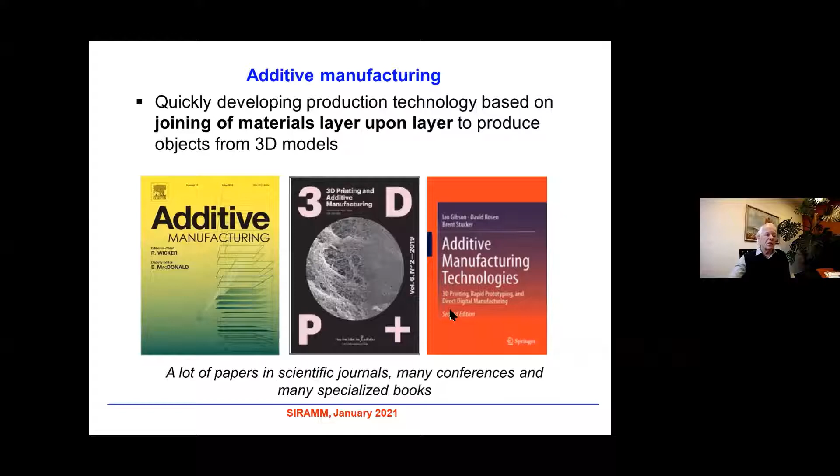Yesterday I checked the database Web of Science. If you check the topic additive manufacturing for the year 2020, you find 6,100 results. Even for this year, 2021, we can find 295 results - more than 10 papers daily. If I take a more specialized term, metal laser sintering, in 2020 there are 211 results. In the broader database Scopus, topic additive manufacturing brings in nearly 30,000 results, and in all years together, 135,000. So could you imagine following or reading all these papers? Impossible.

When we speak about additive manufacturing, very often we hear about the next industrial revolution. I think it is a little bit exaggerated. However, I agree that it is very interesting, very good technology, advanced technology, however for special tasks.

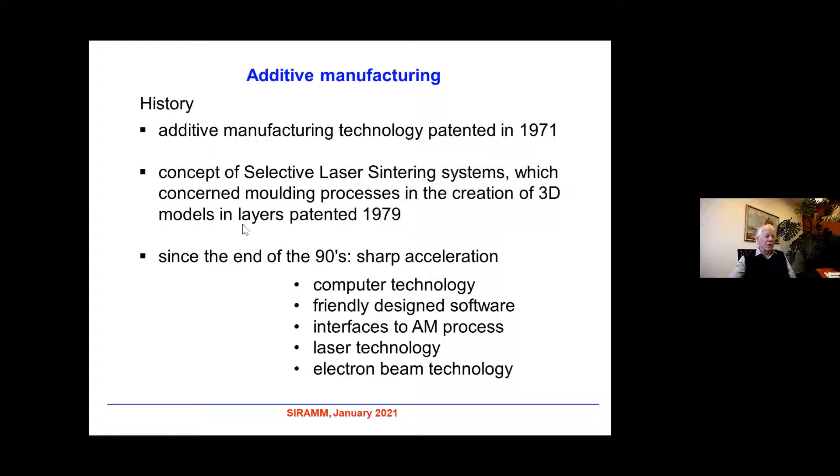As regards materials, it started with polymers. Since the 90s it was focused on metals, and nowadays we are able to print also ceramics.

3D printing or additive manufacturing has obvious advantages. They are mentioned in all papers in the introduction, and they are very nice. These advantages were listed today in the first talk by Professor Torgersen. I would repeat that manufacturing of parts can be done directly from a CAD file. It is very comfortable, and we can do rapid prototyping - we can change the file very quickly and produce a new component.

Very important is that we can build components with very complex shape with internal features. Some of them were presented also in the previous talks, very complicated components for aerospace. Very important is that this technology is connected with minimum material waste, and in the case of expensive materials, it is something significant.

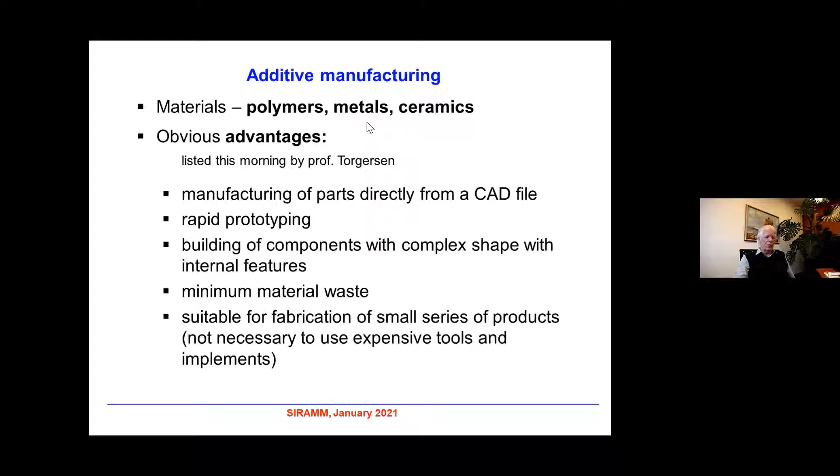On the other hand, there are also drawbacks and shortcomings, and they are mentioned not so often. First of all, it is a very complex technology. The problem is that there are many processing parameters which strongly influence the quality of products and the material behavior. And the problem is that in many cases, if you buy a machine for 3D printing of metals, some parameters are given and you cannot change them so easily.

The technology for metals, for printing of alloys, is expensive. But this is true for metals - it is not so true for plastics.

Problem is rough surface finish. The surface finish is different in different orientations, and it may be a problem in the case of components with very complicated shape, with internal features, and in the case when the components are cyclically loaded, because the surface finish, if it's not good, can decrease the fatigue properties.

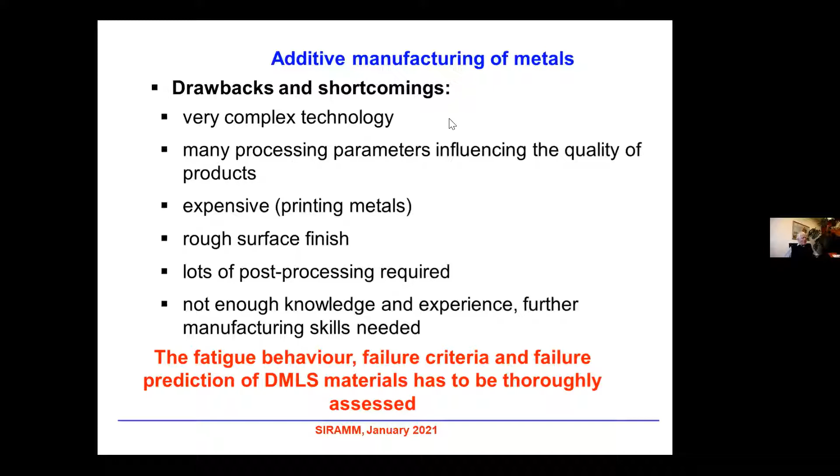Though there is this enormous amount of papers and publications, it is interesting that up to now we do not have enough knowledge and experience. I think that further manufacturing skills are needed, especially in particular cases. So please, I would like to stress that especially fatigue behavior, failure criteria, and failure prediction of direct metal laser sintered materials has to be thoroughly assessed for particular cases.

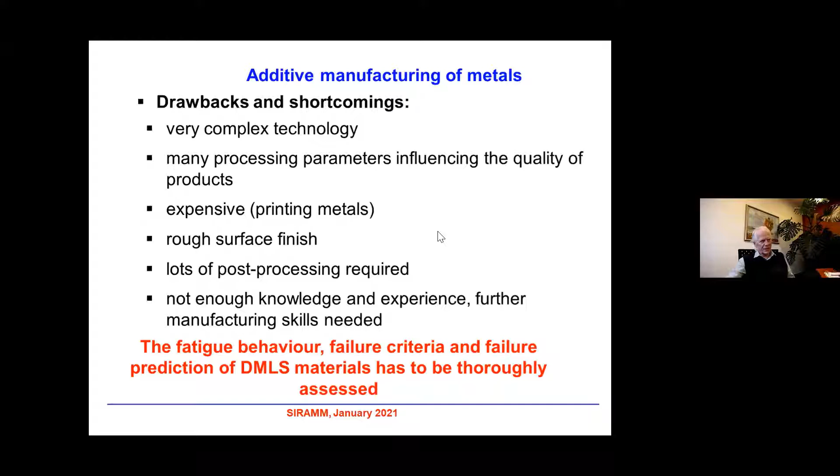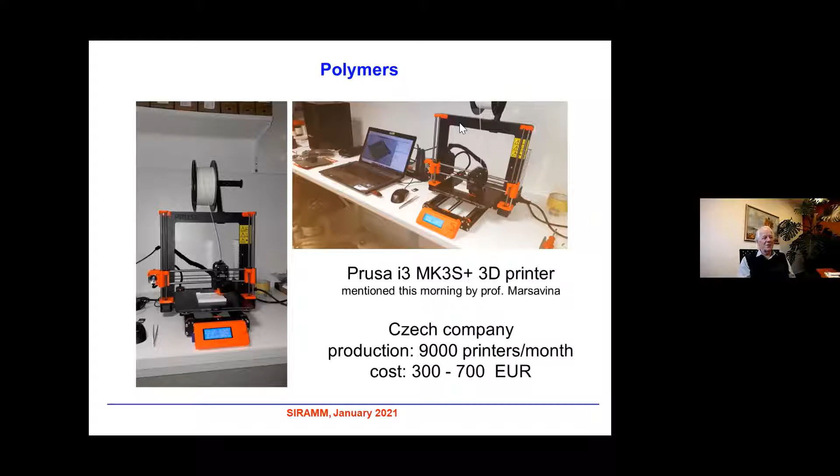This morning we have heard talk about non-metallic materials or plastics, and in our institute we have these machines which are from company Prusa. It is a Czech company, and these machines were mentioned also this morning by Professor Marsavina. They have the same machines in this institute. These machines are produced in Prague, and it is surprising that they produce 9,000 printers a month. The cost is quite low, 300 to 700 euros, so you can buy it also for your own home.

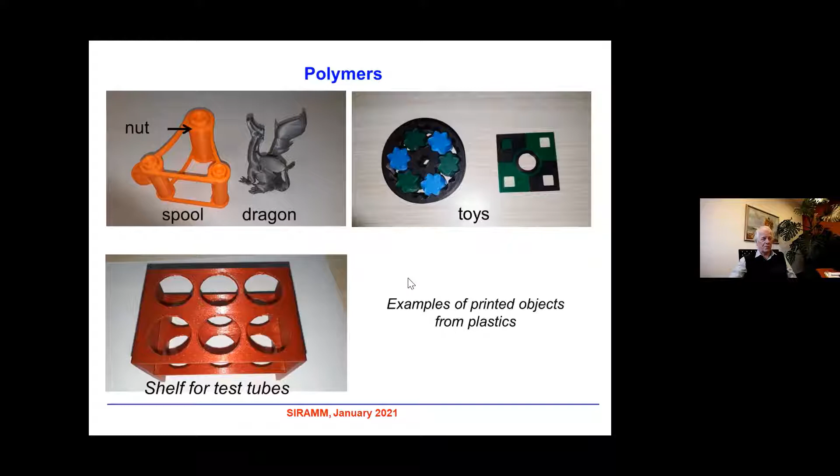You can print things like this. These are only examples for your children. You can print dragons, you can print such a spool. It is interesting that these nuts here, you cannot lose, because you can draw through it, but it cannot be lost. You can print for your lab shelf, test tubes, or some toys. So in the case of plastics, it is very easy.

However, in the case of metallic materials, it is much more complicated. I would like to speak in my talk about two materials, namely titanium 6 aluminum 4 vanadium alloys, and about the super alloy Inconel.

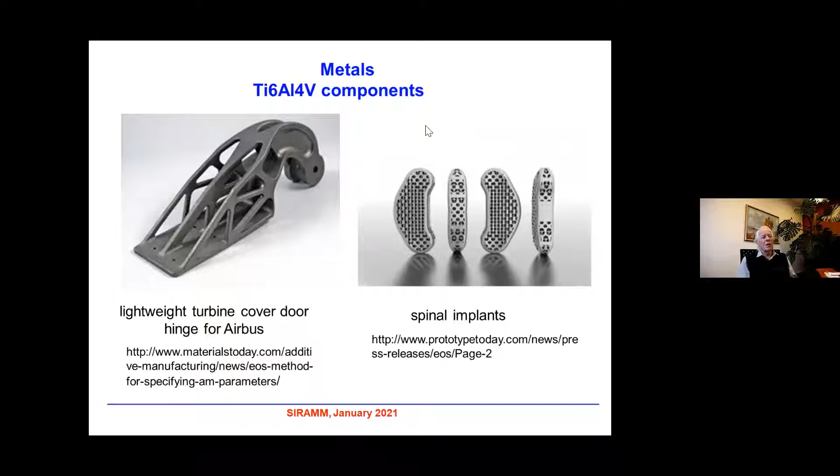On the right-hand side, I would like to show you an example of spinal implants. Again, a complicated component. Could you imagine producing something like that by conventional technology?

Additive manufacturing of metals has practically two main branches, I would say. On the left-hand side is the branch of powder bed technologies. So we build components from powder, and one of the most often used is laser beam melting, and among them direct metal laser sintering. It is a method I would discuss in my talk, and electron beam melting, where instead of laser an electron beam is used.

Then we have powder deposition technologies. It means laser engineered net shaping, direct metal deposition, or laser cladding. There are many other technologies, but I would like to concentrate myself on direct metal laser sintering.

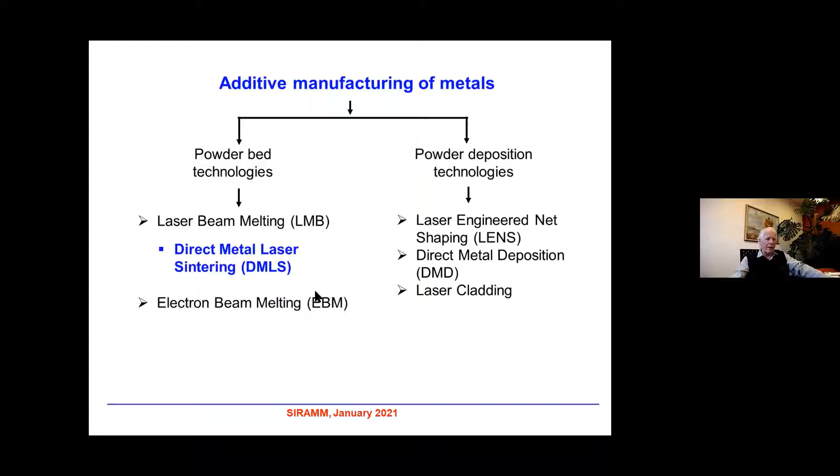The method is relatively easy, and only to briefly mention: the component is placed on this building platform. In the case of direct metal laser sintering, the platform is covered by a very thin layer of powder, which is in this container, applied by this recoater. Then the thin layer of powder is melted by a laser beam, which is coming from the laser unit through the scan head, which is moved by computer, and layer-wise the component is built. The building platform is decreasing.

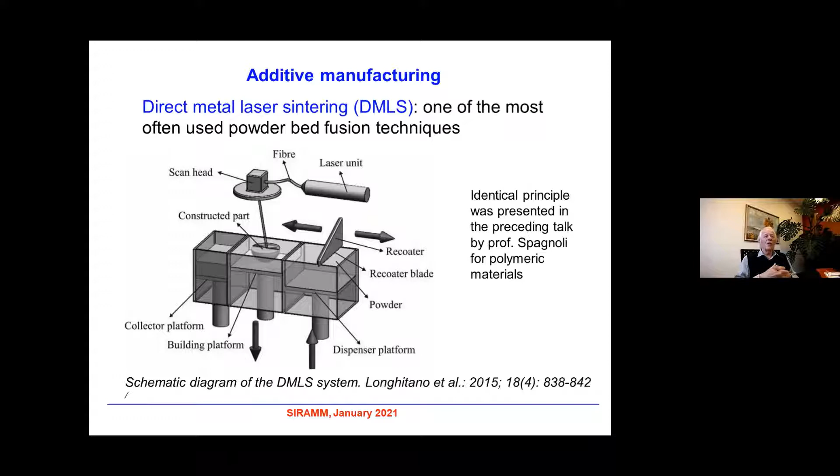Practically the same principle was presented in the preceding talk by Professor Spagnoli for polymeric materials. So the principle is identical.

In the case of metallic materials, the machines are naturally much more expensive than systems for plastics, and cost is in the hundreds of thousands to millions of euros. Here you can see examples of three machines, namely Renishaw A250, EOSINT M270, and SLM 280HL. These are machines on which we produced our specimens for our testing.

At the market today, you can find many, many specialized machines.

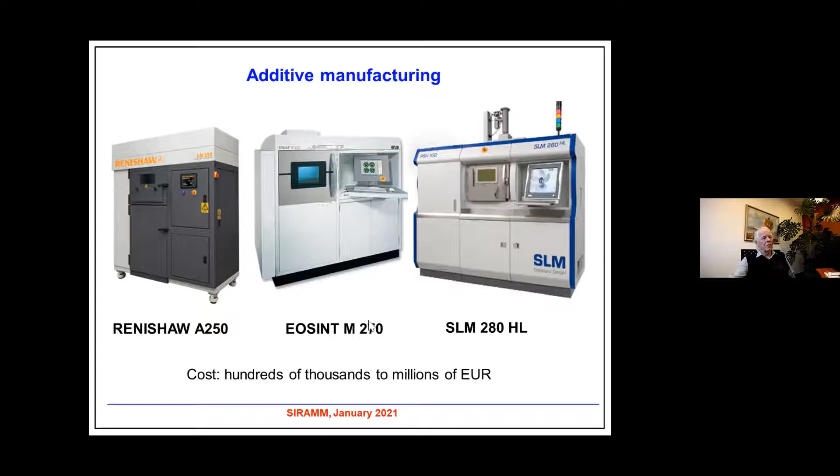Properties of direct metal laser sintered materials are strongly dependent on many processing parameters. It was mentioned also in the preceding talks. But I would like to stress that in the case of metallic materials, it is much more important to set precisely all parameters.

We begin with input powder. The input powder has to have good quality, purity, size, and so on.

Important is the laser scanning strategy. It means how the laser beam is moving on the platform, on the component. This strategy may be specific for specific machines. Nowadays there are even systems using two or more laser beams simultaneously to increase the velocity of building.

Important is energy density: how much energy the electron or laser beam brings into the material. Important is scan speed: how quickly the laser beam moves on the material, on the powder, and how quickly it produces this melting pool. Also the laser power is important.

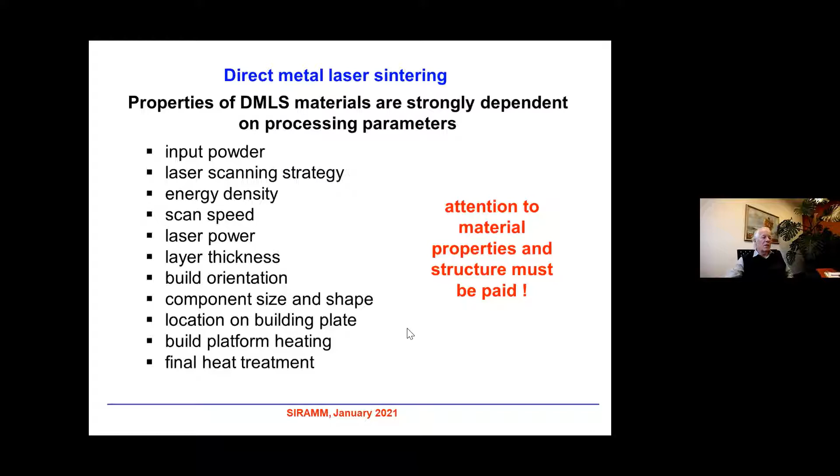At the beginning I told you I will speak about two engineering alloys which are often used, namely titanium alloy, titanium 6 aluminum 4 vanadium, which is low weight, high strength, biocompatible, with high corrosion resistance. It is used in conventional form in aerospace, medicine, and chemical industry.

The second material, completely different, is Inconel 718 super alloy, used for high temperature and cryogenic applications, with excellent high temperature and cryogenic properties. It is used in many industrial applications.

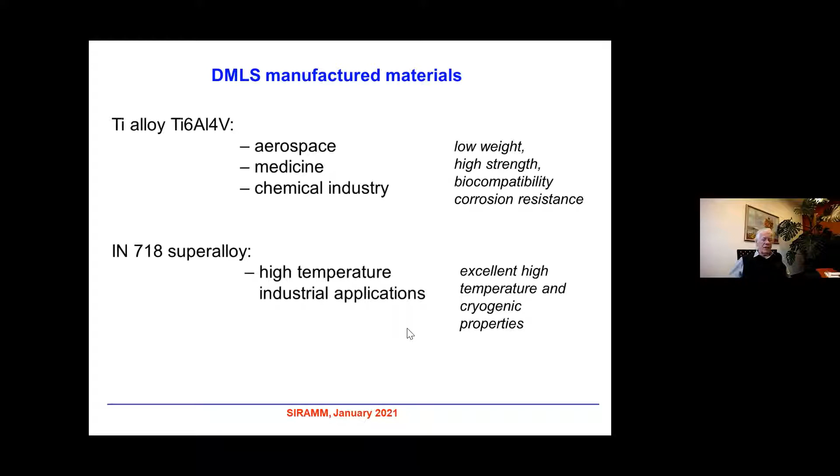Also important is uneven defect distribution in the component. If we have a place where defects concentrate, and simultaneously this place is loaded by cyclic loads, it may be dangerous.

A problem is directionality of structure, meaning anisotropy, due to layer-wise building of the material. High residual stresses in the component also play a big role in this technology, and naturally surface quality, which is dependent on the building direction and again strongly influences the fatigue behavior of materials.

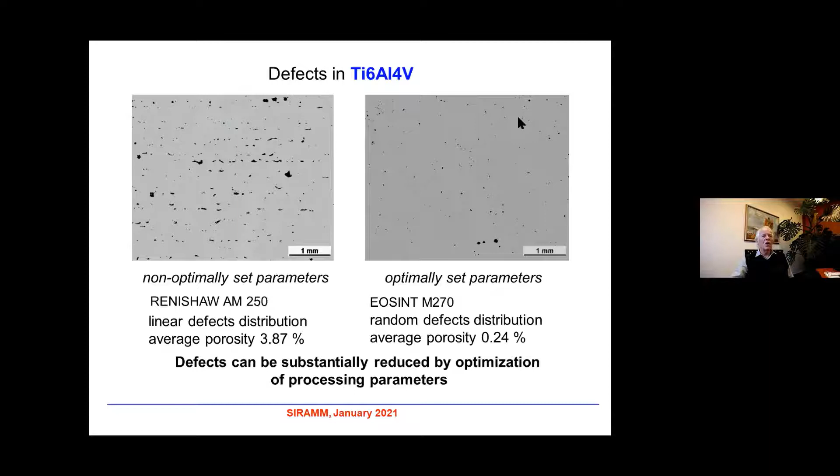Such material is naturally not very good from the point of view of fatigue behavior. On the other hand, on the right-hand side you can see the microstructure of titanium 6 alloy with optimally set parameters, produced on an EOSINT M270 machine. The defect distribution is random, and the average porosity decreased to 0.24%. So please remember that defects can be substantially reduced by optimization of processing parameters.

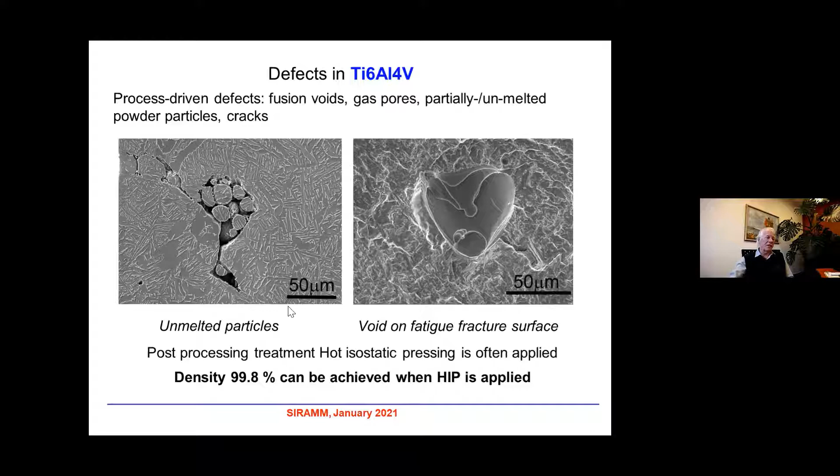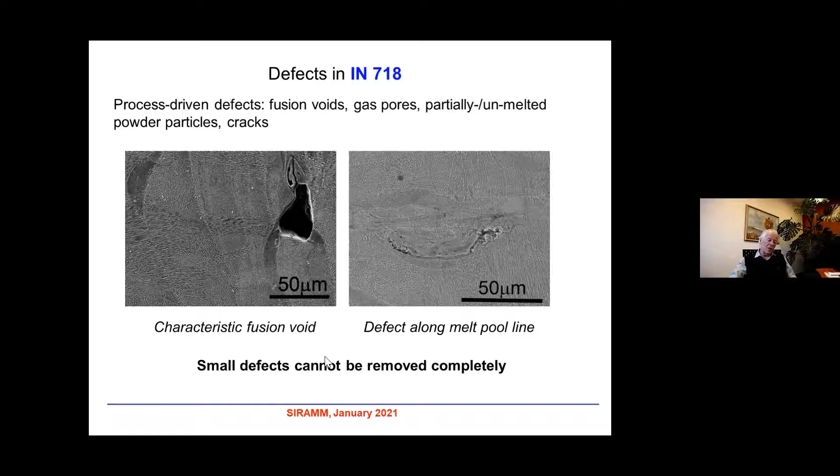It is important to say that very small defects cannot be removed completely in the case of both materials. When they are very small, from the point of view of fatigue it is not decisive. When they are large, it is dangerous.

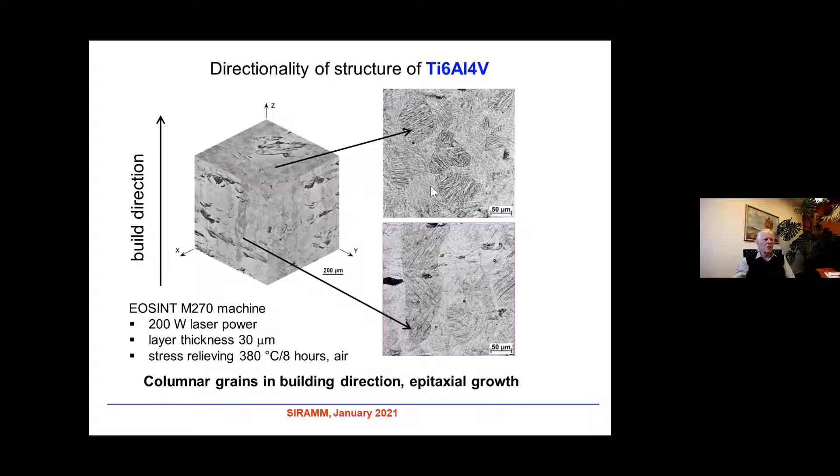The microstructure consists of columnar grains in the building direction, and we can see epitaxial growth here. On this plane, which is perpendicular to the build direction, you can see the cross-section through these columns. So the microstructure is different in different orientations. Now, how it looks in the case of Inconel.

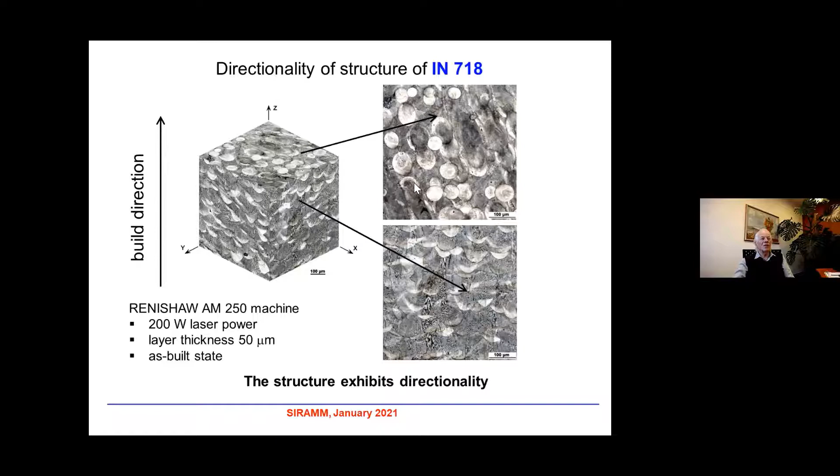Inconel was produced on a Renishaw machine, another machine. Laser power was 200 watts, layer thickness larger at 50 microns, and it is in the as-built state. Again you can see directionality of microstructure - here you can nicely see the laser melt pools, how the laser melted the material. There is directionality in the build direction, and on the plane perpendicular to the building direction you can see sections through these melt pools. So again, the structure exhibits directionality.

Residual stresses are a very important topic. These stresses develop due to rapid heating and cooling, and they can result in deformation of the component, even failure. So the process has to be designed to minimize these residual stresses. They appear both within the additive process and in post-processing steps, and they influence dimensional accuracy, distortions, and so on.

We distinguish residual stresses according to three types: type 1, type 2, and type 3. Type 1 are macro-scale stresses. They are most important, and they can change dimensions or cause distortions of the component.

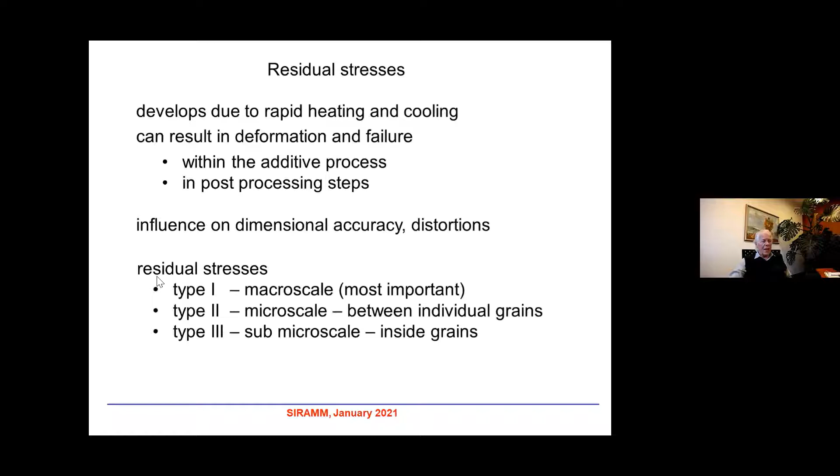Type 2 are microscale stresses between individual grains, which can influence, for example, fatigue initiation and mechanisms of damage. Type 3 are sub-microscale stresses inside grains, and they influence movement of dislocations. They can also influence the behavior of the plastic zone in the case of fatigue cracks when they propagate very slowly. So all three types of residual stresses can influence the fatigue behavior of materials.

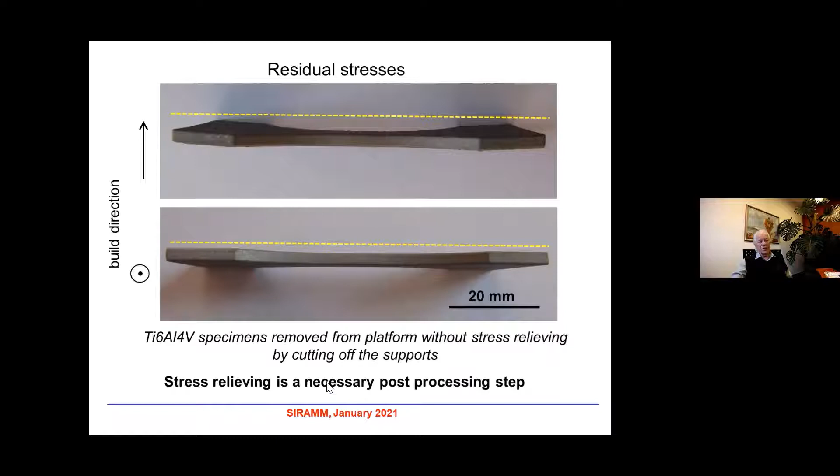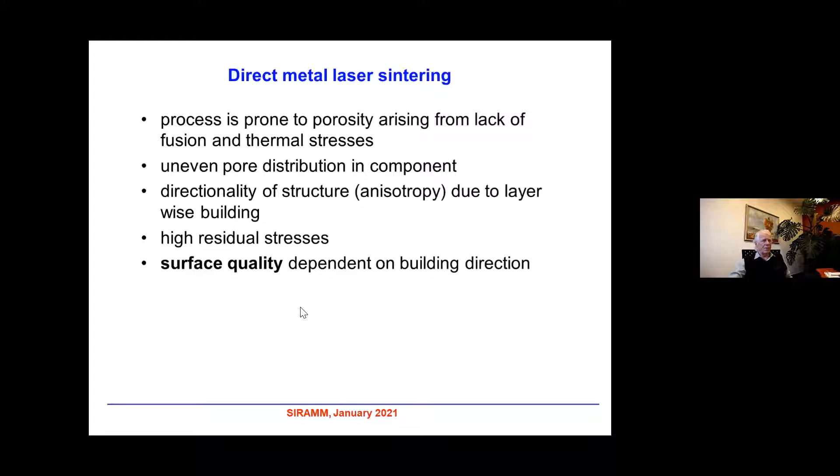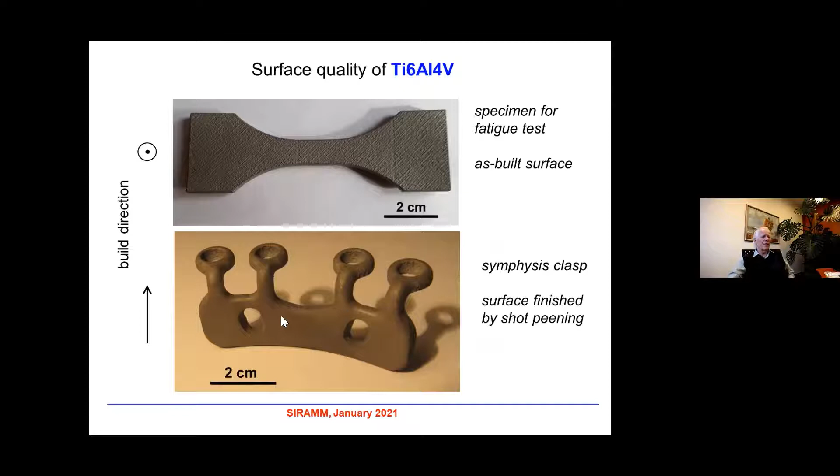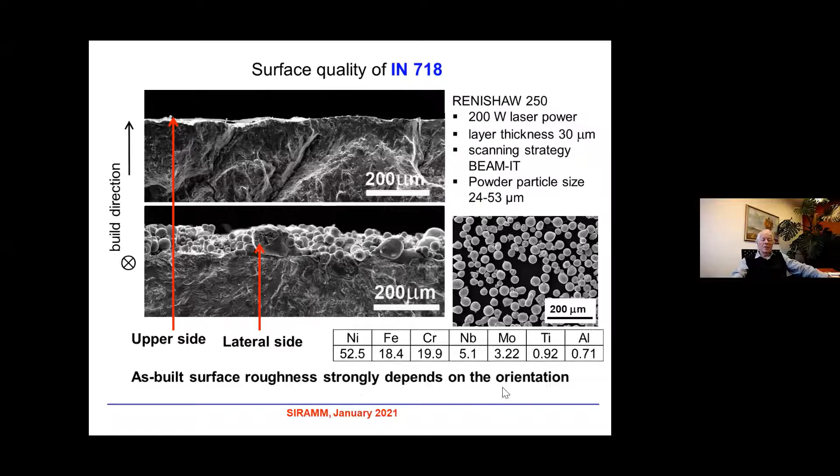So the as-built surface roughness strongly depends on the orientation. Please remember this statement.

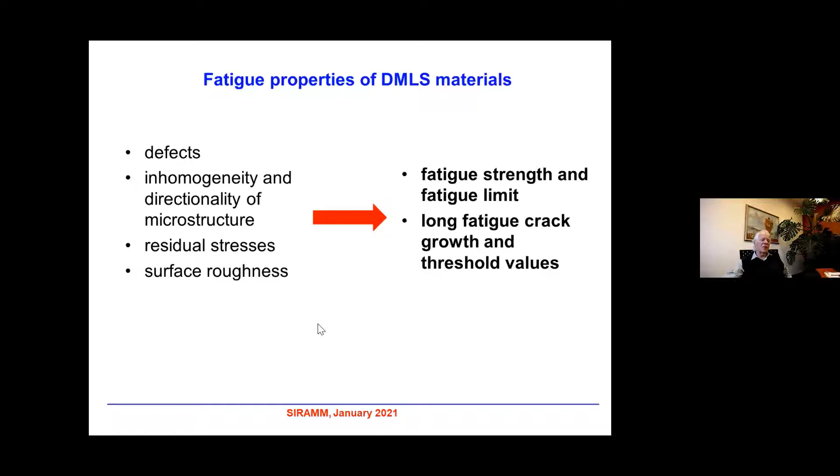Let me now conclude that fatigue properties of direct metal laser sintered materials strongly depend on defects and their distribution, on homogeneity or inhomogeneity and directionality of microstructure, depend on residual stresses and microstresses, and naturally on surface roughness. All these parameters strongly influence fatigue strength and fatigue limit, and also influence long fatigue crack growth and threshold values. I would like to show you some concrete results which we obtained on materials produced by direct metal laser sintering.

Let us start with Ti6Al4V alloy. We have prepared specimens for plane bending, built on an EOSINT M270 machine with 200 watt laser power. The layer thickness was nearly 30 microns, and a multi-directional scan strategy was chosen, meaning the scan direction rotated in the preceding layer by some angle. Finally, the material was stress relieved at 380 centigrades for 8 hours in air.

We prepared 3 types of specimens with 3 orientations, shown here. The first case, denoted A, means the specimen is loaded such that the crack initiates on this surface and then propagates across the layers, opposite to the build direction.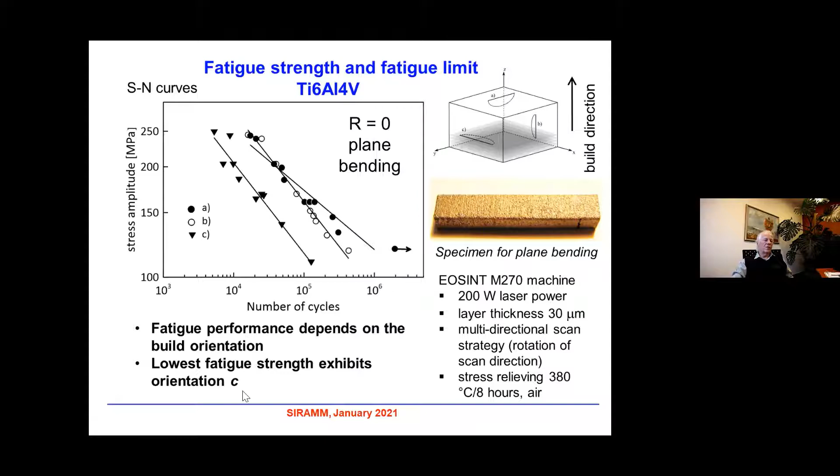You can see that the worst orientation is orientation C, when the crack starts on the surface and propagates along the layers. The difference is quite large. For example, if the loading were that of a component for treating the human pelvis, say 120 megapascals, after 10 to the 5 cycles the component would fail in orientation C. However, if the orientation is A or B, the specimen will survive. So fatigue performance depends strongly on build orientation, and in this case the lowest fatigue strength is exhibited by orientation C.

Once more, to show the situation: when the build direction is such that the crack initiates here and propagates practically through this material, through the structure, the lifetime is worst.

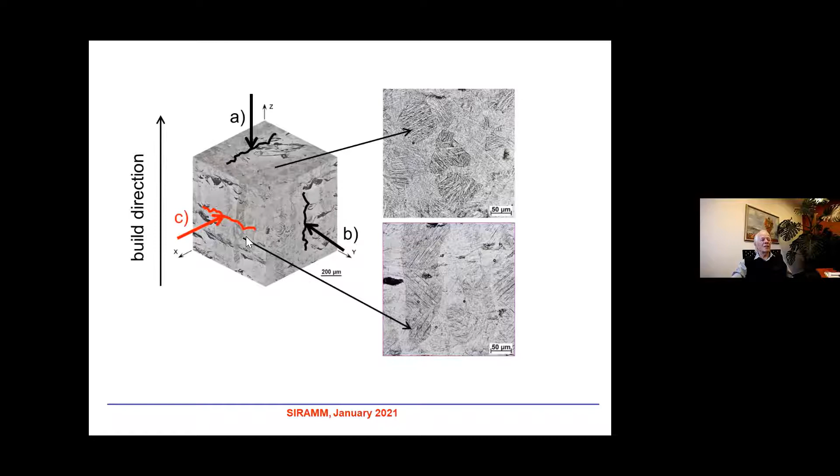Now I would like to show you results on a completely different material, namely Inconel 718. This material was manufactured on another machine named Renishaw 250. The laser power was nearly 200 watts, and the layer thickness was 30 microns. Again the scanning strategy was BEAM-IT strategy. The heat treatment in this case was: 970 centigrades for 1 hour, then cooling in argon, then age hardening at 710 centigrades for 8 hours, and then 610 centigrades for 8 hours. It is quite a complicated heat treatment.

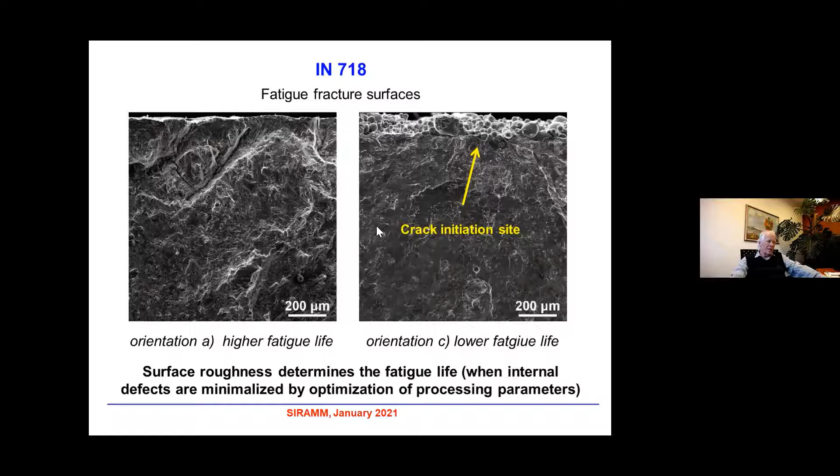Here you can see fracture surfaces of the specimens presented earlier. On one side you can see a relatively flat surface with higher fatigue life; the crack started somewhere here and propagated in this direction. On the other side, orientation C, with a not so nice surface and lower fatigue life, the crack initiation site was nearly in this region. So surface roughness determines the fatigue life when internal defects are minimized by optimizing processing parameters. I repeat, to remove internal defects completely is practically impossible.

So the next topic is the problem of propagation of long fatigue cracks.

Just a moment, something. Yes, okay.

Propagation of long fatigue cracks. It is also important because if you have a component, for example for aircraft industry, there are often cracks in such components. Airplanes are flying with cracks, and we have to say, okay, this crack is okay, this component has to be changed. So we have to know how fatigue cracks propagate in materials.

We have prepared 3 types of CT specimens. There are specimens where the crack is initiated by cyclic loads from this notch, and then the crack is propagating in this direction, and we measure the fatigue crack growth along this curve.

We have prepared 3 types of specimen again. Type 1, or type A, is when the crack growth is perpendicular to layers. Then type B is crack growth perpendicular to layers and in plane parallel to build direction. And case C, the crack growth is along the layers, perpendicular to build direction.

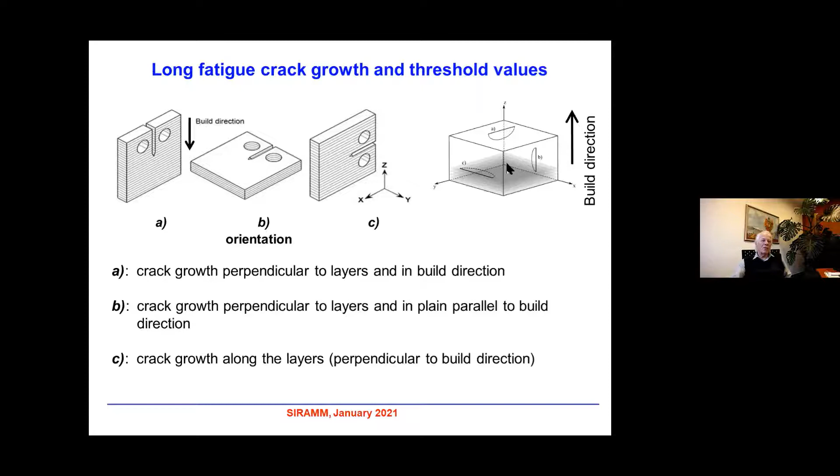We have performed tests on Roell Amsler resonant testing systems. The frequency of loading was between 60 and 80 Hertz. Experiments were done at room temperature in air. The cracks were, in our case, determined by optical measurements by microscope or CCD cameras. The measurement was done according to ASTM standard, which prescribes the conditions of testing.

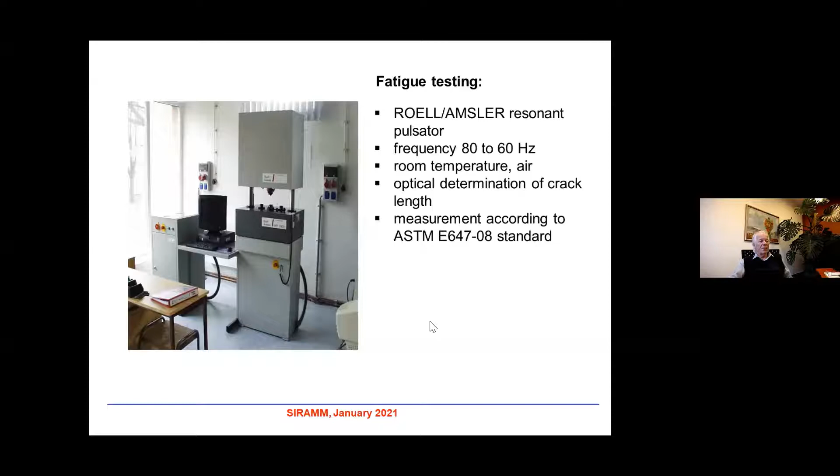Let me say some words about microstructure. I told you that the as-built specimen has to be somehow treated by temperature treatment, heat treatment. This material was prepared on an EOS M270 machine. The laser power was nearly 200 watts and the layer thickness was 50 microns. The laser speed was 0.8 meter per second, and again the scanning strategy was developed by BEAM-IT.

The stress relieving was done at 380 centigrade for 8 hours in argon. Our aim was to study the influence of heat treatment on fatigue crack growth.

Some words on the microstructure of this material. Here you can see the microstructure on the plane which is parallel to the build direction. You can see primary columnar beta grains which are elongated in this direction. On the plane which is perpendicular to the build direction, we can see again columnar structure, and these columns are seen as circles on this plane.

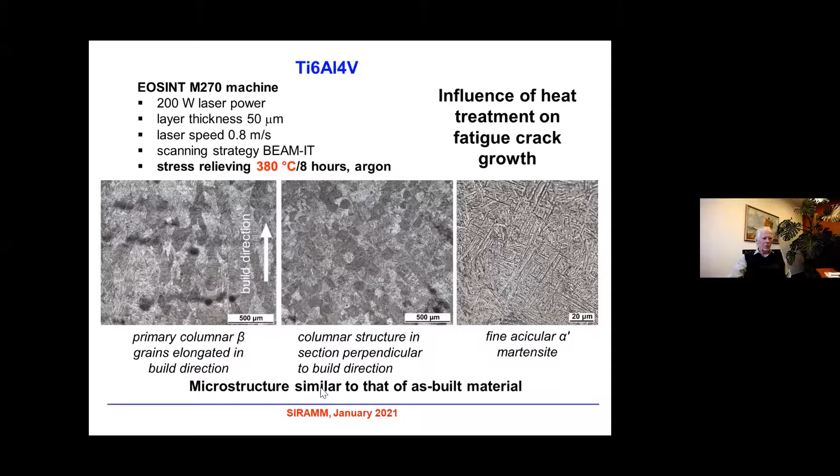At higher magnification, we can see that this microstructure is relatively homogeneous, and it is a typical fine acicular alpha prime martensite structure. This structure is only slightly different from the microstructure of the as-built specimen. If you perform a study of microstructure on the as-built specimen and this specimen, and mix the photos, you are perhaps not able to distinguish them. So the microstructure is similar to that of the as-built specimen.

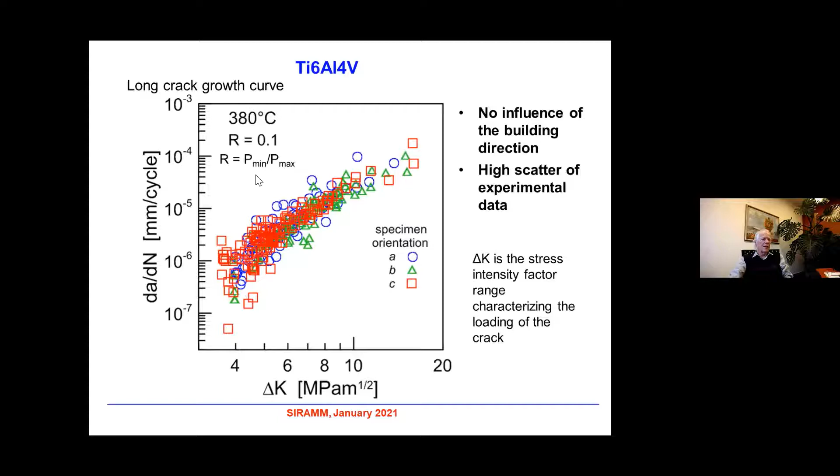You can see, first of all, that the experimental data exhibit a very large scatter. Secondly, there is no apparent influence of building direction - orientations A, B, and C fall in one broad scatter band. It's worth mentioning that the loading was done at R ratio 0.1, meaning the minimum to maximum load ratio was 0.1.

Now let me compare this data with as-built material. Here you can see our data, but only orientation C in this case, after stress relieving at 380, compared with as-built material. These data were taken from literature, from a paper by Leuders and a paper by Becker. You can see that their scatter was also very high. However, the curve for as-built material is shifted to the left, meaning to higher crack growth rate. So for the same loading, let's say 6 megapascal meter to the 1/2, the difference is nearly one order of magnitude or more. So here the propagation is much quicker.

The main problem, however, is in the threshold values. The threshold for crack propagation in the as-built material is shifted towards very low values, nearly 1.3 megapascal meter to the 1/2. What does this mean? When I have a small crack in this as-built material, it propagates much more easily than in the stress-relieved case. So we can see that only the stress relieving resulted in improvement of the as-built material.

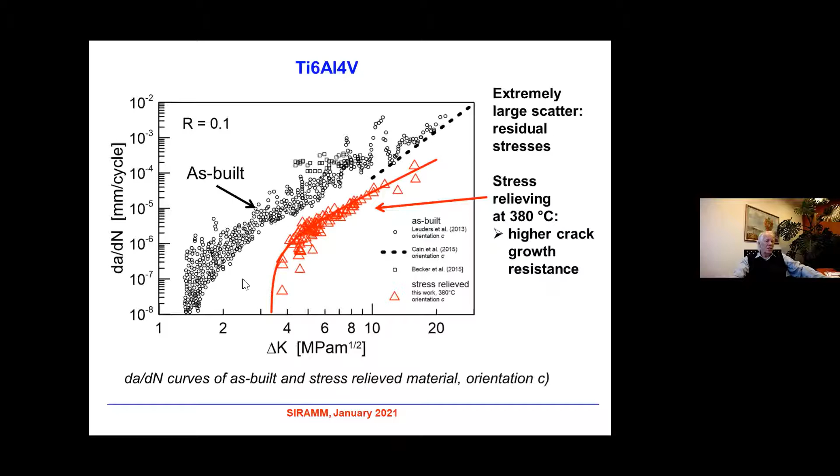So it means that the heat treatment at 380 centigrade removes long range residual stresses, which is good. It means the component is not deformed when we remove it from the platform. Simultaneously, it seems that explaining this shift by means of residual stresses, which was done in the literature, is perhaps not okay. It seems that long-range residual stresses are not responsible for the high scatter of data, and it means that the details of the crack growth mechanism in this material should be further investigated. It is a little bit of an open question now.

So let me show you results on the same material produced on another machine, namely EOSINT M290, with 400 watt laser power. Laser beam diameter was 70 microns. Layer thickness was 60 microns.

The material after production was heat treated at 900 centigrade for 2 hours, then cooled to 520 in argon, and then to room temperature. Again, the microstructure - excuse me.

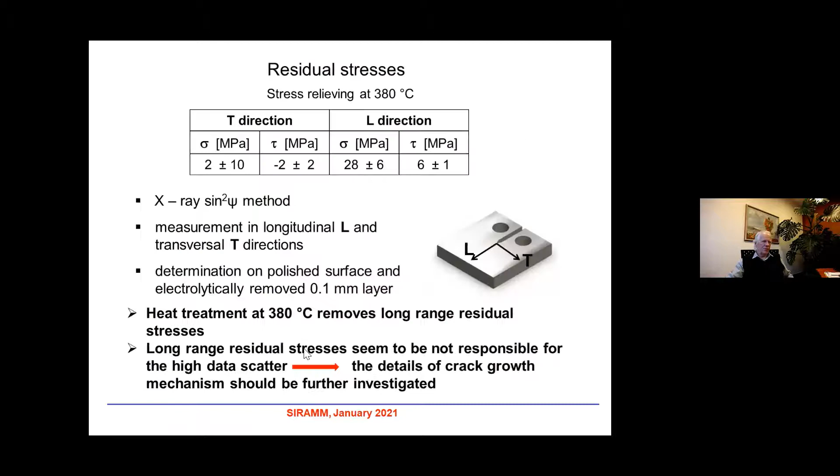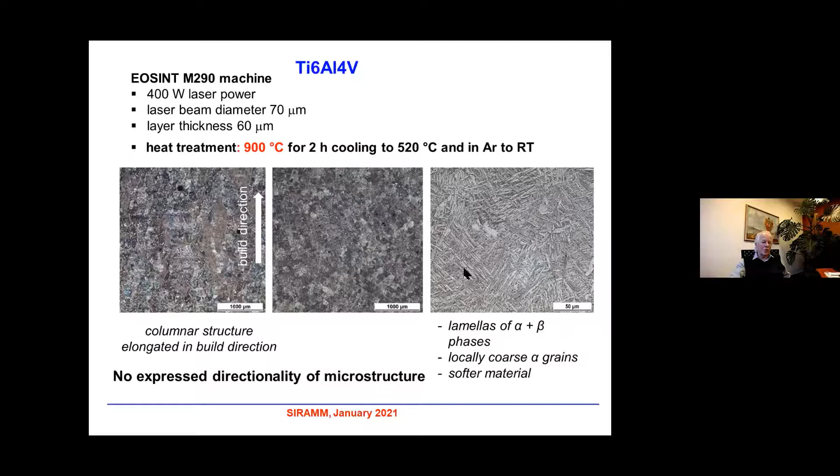This is the build direction. You can see again columnar microstructure and elongated structure, not so pronounced as in the case at 380. Similar situation on the section by the plane perpendicular to build direction, and at higher magnification we can observe a little bit coarser microstructure, lamellas of alpha plus beta phases. Locally we can find coarse alpha grains, and the material is generally somewhat softer, so here there is no expressed directionality of microstructure.

We have again measured the crack propagation curve, which is the dependence of crack growth rate on the stress intensity factor range. What we can see is that all orientations A, B, and C, or points, lie on one curve. The scatter is relatively small, like in conventional materials.

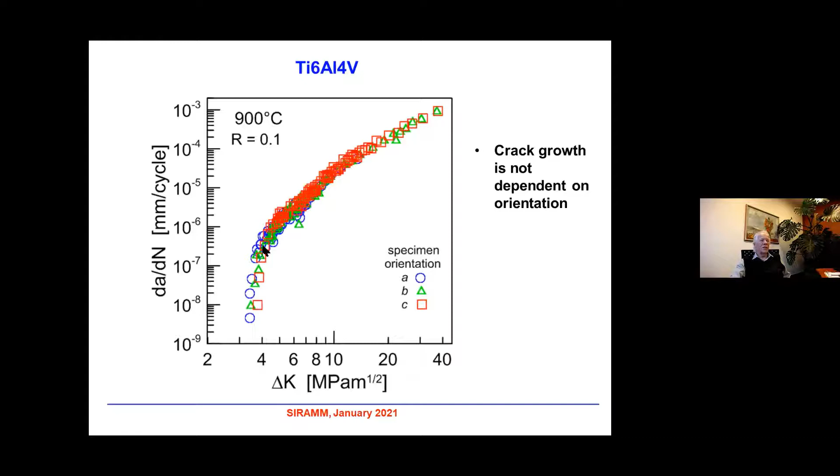The scatter is small, and if we compare now data at 380 and 900, we can say that this curve can be fitted quite well with these two curves, and the threshold value - the value below which the long crack does not propagate - is 3.5 megapascal root meter for 380, and practically the same for 900. So here there is only reduced scatter of experimental data.

And now please, we can compare - no, just a moment, yes. Now I would like to show you the fracture surfaces.

At 380, the fatigue crack propagates practically in the threshold region, meaning the region where the crack growth is very slow, through the microstructure. So the crack profile is very flat, and the fracture surface doesn't exhibit special features. There is no apparent influence of columnar grains on the crack growth. The crack propagates in this case at 380 at this low rate by cyclic damage of fine alpha prime martensite structure.

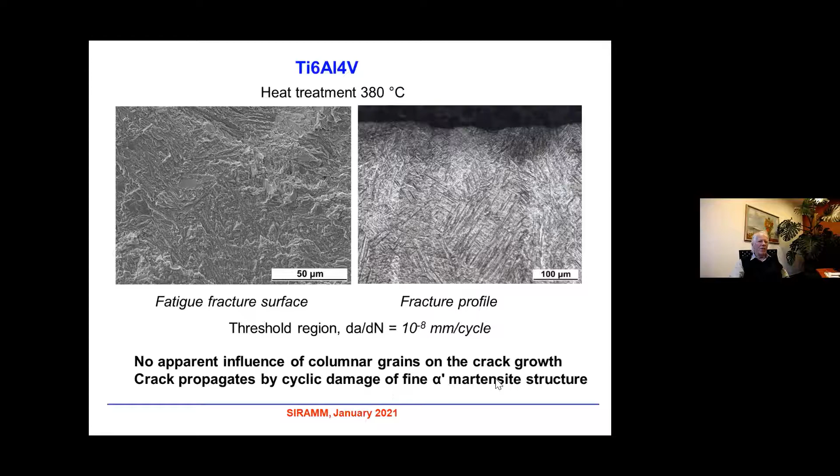So the crack growth mechanism consists of cyclic damage of fine alpha prime martensite acicular structure at 380, and it changed to damage of fine lamellar alpha plus beta structure at 900 centigrade. Nevertheless, there is practically no influence on the threshold values, so the mechanism seems to be a little bit different.

So it means that if we set very well the parameters of 3D printing, and very well heat treat, we can reach material which is comparable to conventionally produced material.

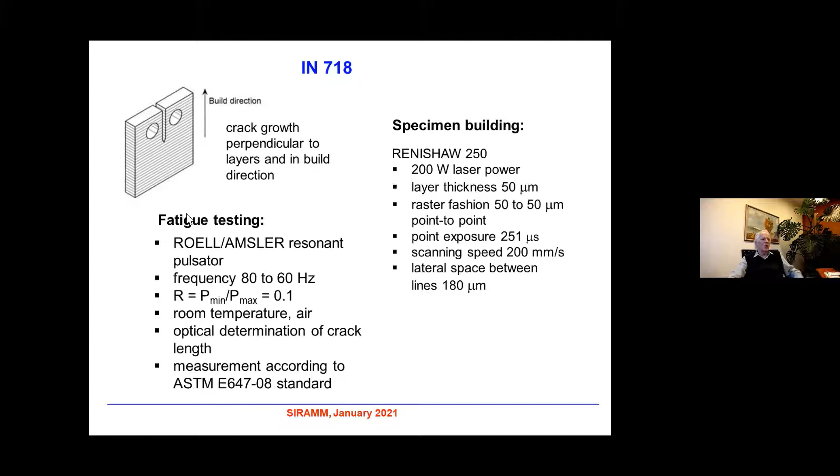You can see that there are many parameters which can be changed. And the fatigue testing was performed again on our Roell/Amsler resonant testing pulsator.

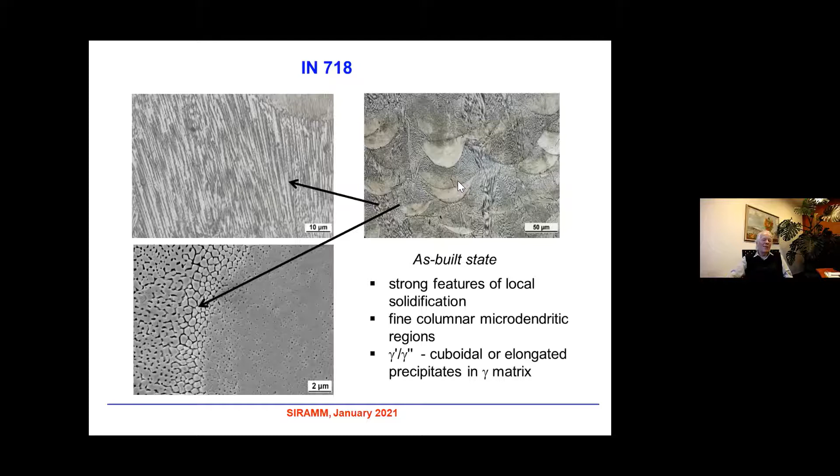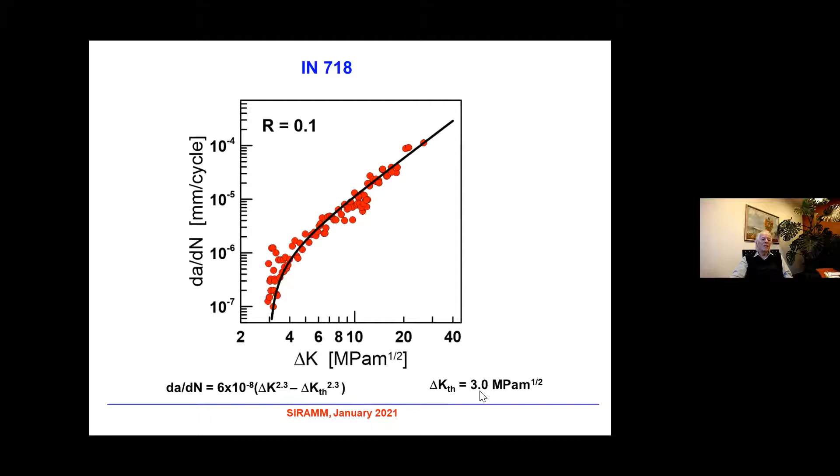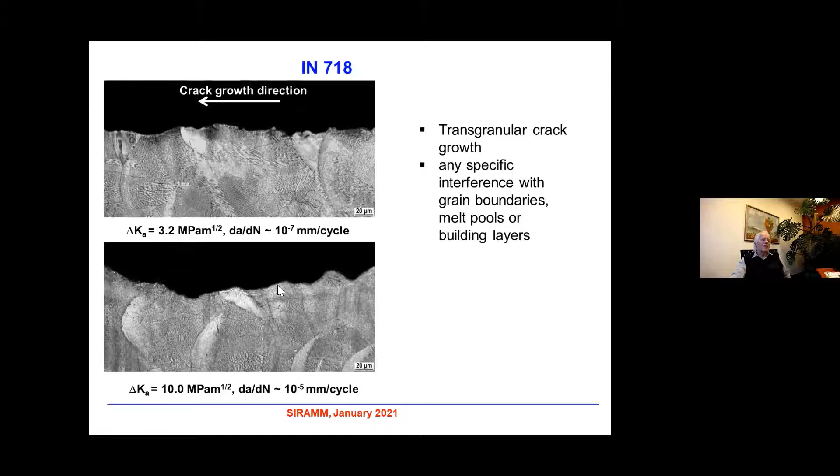As regards the fatigue fracture surface, for the near threshold region where delta K is only 3.2 and the crack growth rate is low, we can see on the fracture surface that the mechanism of growth is based on planar cyclic slip. Damage takes place mainly in slip bands. This is derived from other observations of the microstructure of this material, which I am not showing here. We can observe formation of microcracks and linking of microcracks to the main crack. This is the mechanism of crack growth in this material at low crack growth rates.

On the other hand, in the Paris region, for delta K of 10 megapascal, where the crack growth rate is nearly 10 to minus 5 millimeter per cycle, you can see that the fracture surface is much coarser, but a little bit similar to that in the threshold region.

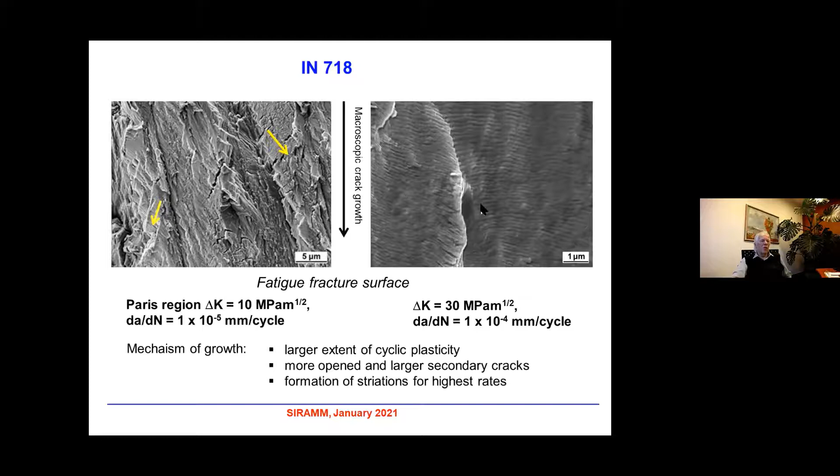So it is very similar to the behavior of conventionally produced material. Now, if we compare our data on material produced by selective laser melting, this curve, with conventional data—and I compare it with very old data published nearly 50 years ago on conventional material—we can see there is a big difference.

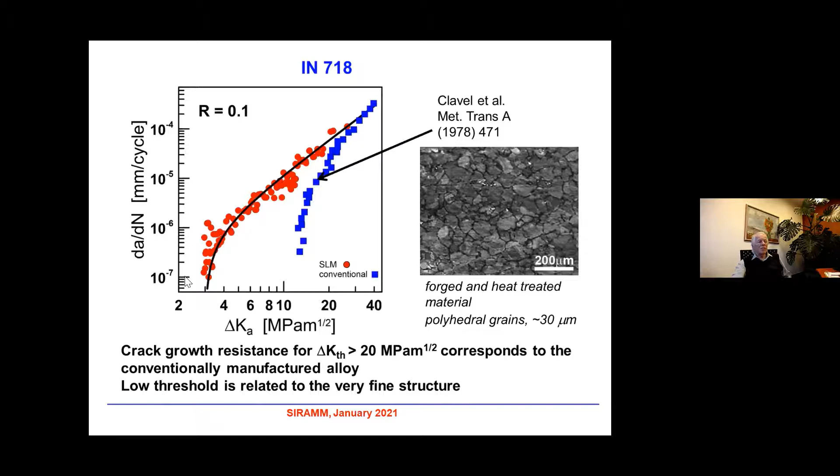Practically, we have the same behavior here for the highest rates, because the mechanism of crack growth by means of striations and so on is identical. However, in the threshold values, this material produced by the additive manufacturing technology is definitely much worse. So I can conclude that crack growth resistance for delta K threshold above 20 megapascal corresponds to the conventionally manufactured alloy, while the low threshold is related to the very fine microstructure, and the material behavior is much worse.

So there is space for improvement of technology, and maybe it can be changed in such a way that the material behavior would reach the behavior of conventionally made material.

My last part of the presentation is focused on the influence of pre-deformation on fatigue life of Ti6Al4V alloy, which is used for implants. We cooperated with a company developing implants for treatment of the human pelvis.

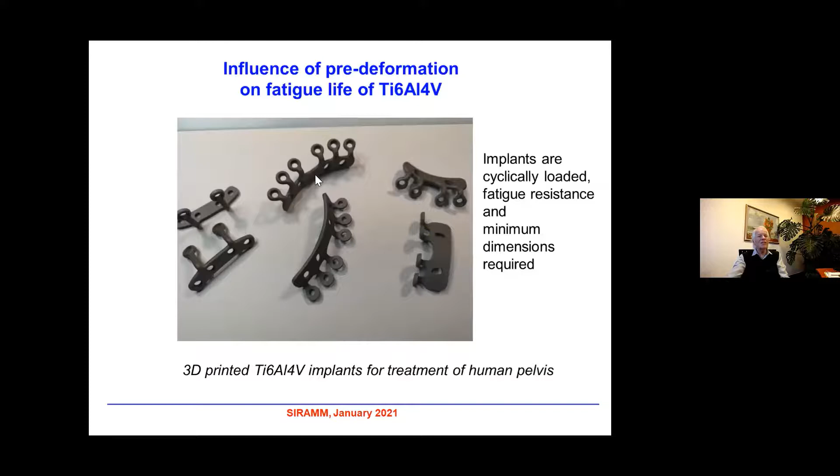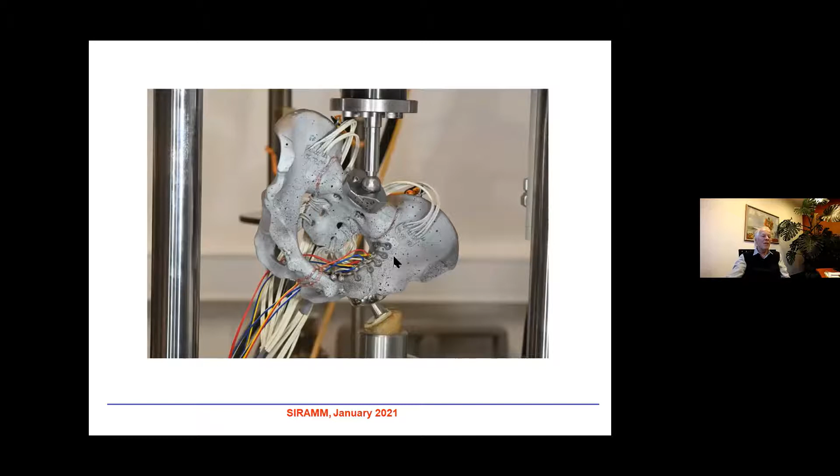We also prepared specimens for tensile tests. These specimens were heat treated at 950 degrees for 2 hours, and the surface was treated by corundum powder blasting and ballotining, the same as is used for these implants.

Now we wanted to determine the fatigue life curves, S-N curves, for undeformed and pre-deformed specimens. The reason was simple: if you apply this implant to the pelvis, during the surgical procedure it is slightly bent. These parts get bent.

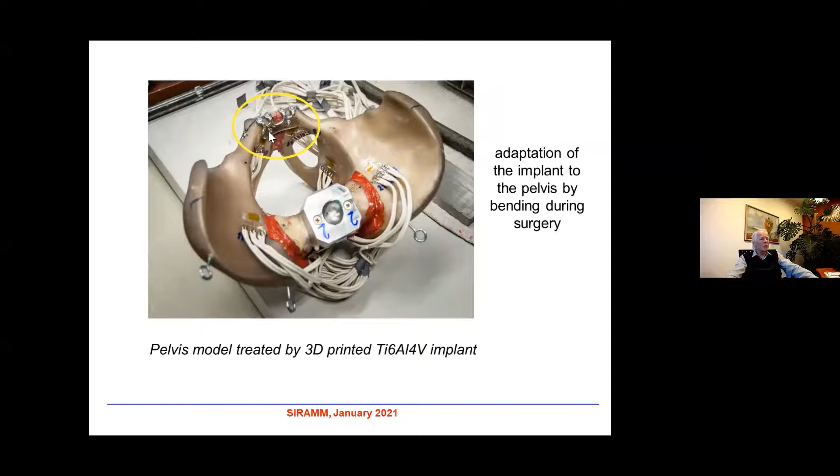Now there is a question. In the case of conventional steels, this doesn't play a role. How is it in the case of implants which are printed? So we pre-deformed specimens to 2% plastic strain and formed S-N curves. It's a dependence of number of cycles to failure on the stress amplitude, again for loading with R equals 0. The fatigue limit here is nearly 160 megapascal.

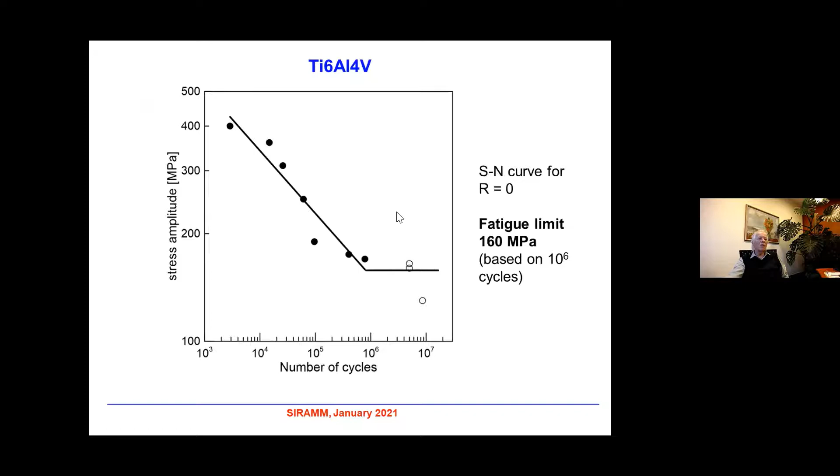This is based on 10 to the 6 cycles. These points are specimens which failed; unfailed specimens are here. Now, if we compare with pre-deformed specimens, the lifetime is substantially lower, and we even go below the fatigue limit for this small plastic deformation of the material.

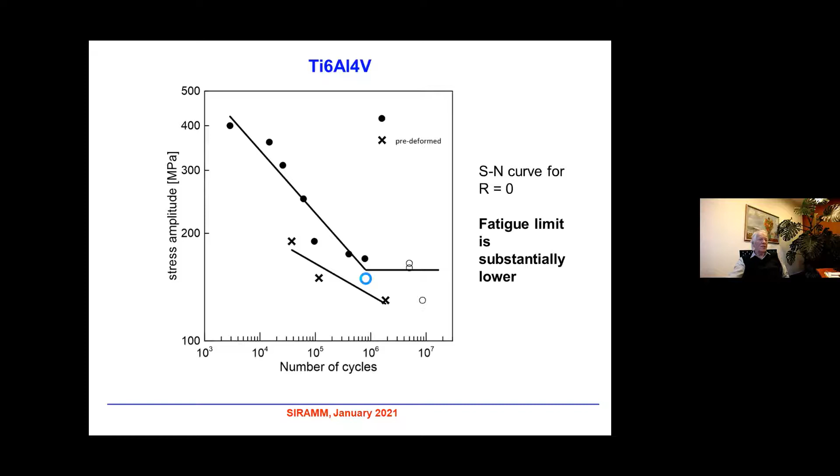So it's a very important result, meaning that during this small plastic deformation, since the beginning, in the surface layer, cracks appear, and these cracks can then propagate very easily and result in a very low fatigue limit.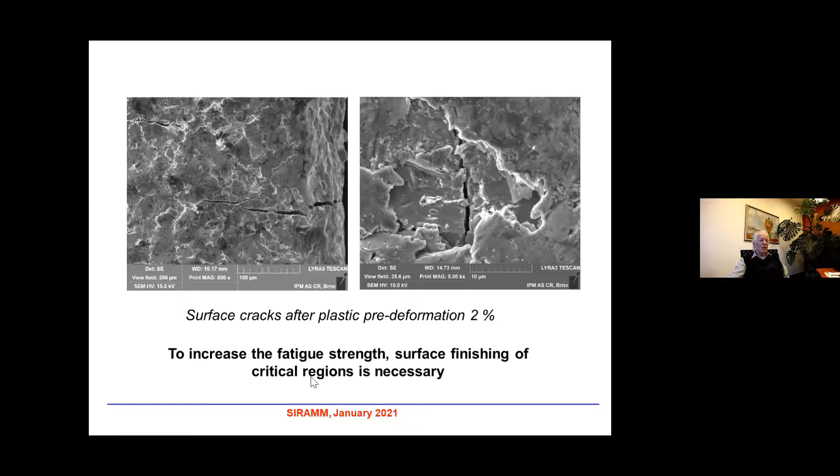So to increase the fatigue strength, surface finishing of critical regions of components is necessary. In our case, the areas bent during application of this implant should be polished sufficiently. Ladies and gentlemen, I was perhaps a little bit longer, I apologize, let me conclude my talk.

I would like to conclude that fatigue behavior of direct metal laser sintered engineering alloys is strongly dependent on many processing parameters. It is nothing new, but nevertheless it has to be kept in mind. To get materials with good fatigue strength and good crack growth resistivity, it is necessary to set optimal processing parameters and use post-processing procedures, which is not an easy task.

To guarantee the fatigue properties of direct metal laser sintered materials, fatigue and microstructure tests have to be performed for the applied processing parameters and post-processing treatment. Thank you very much, that's all from me. Thank you.

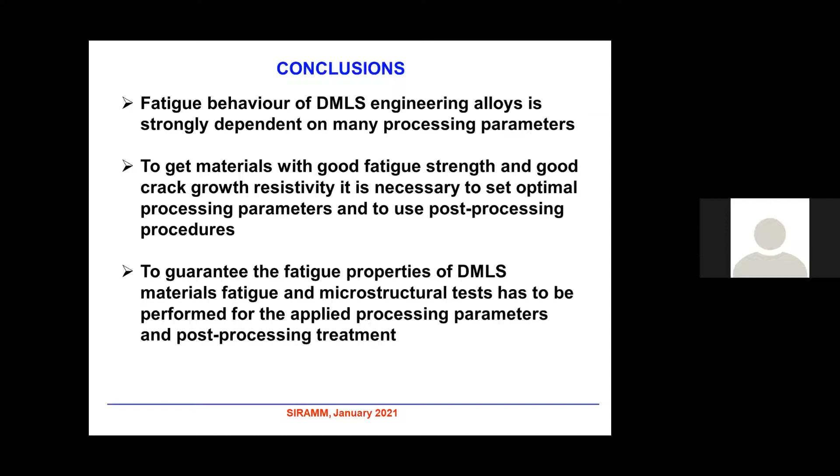I've seen that in the case of fatigue behavior, there is the influence of crack initiation, compared to fatigue crack propagation, because you showed that only if the crack is growing between the layers is there lower fatigue durability, fatigue life. But for fatigue crack growth, there is no influence of the microstructure. Why is there no influence of microstructure in the case of propagation or long crack propagation, yet there is influence when the crack is initiated and growing?

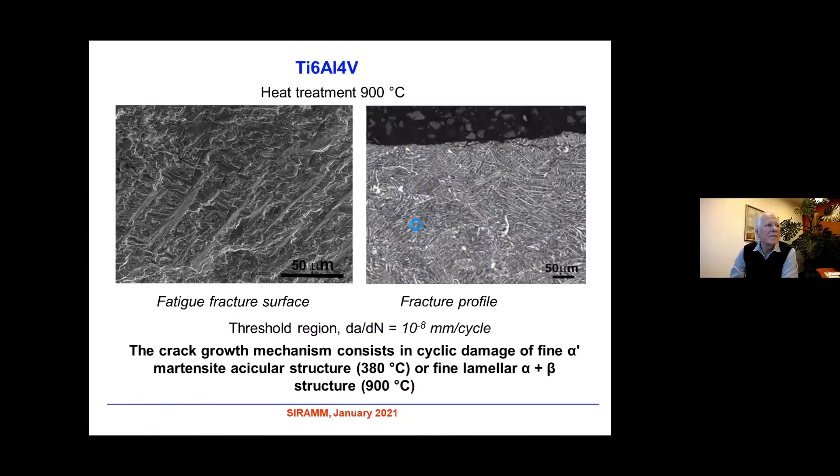Just a moment. Yes, so the whole lifetime is given by changes of mechanical properties during cycling. That is the first stage, then crack initiation, then crack propagation. The total life is a sum of all these effects. In this case, it is given predominantly by initiation of cracks, and crack propagation plays a very small role.

On the other hand, if you have a very long crack in a component, let's say 10 millimeters, then the problem of crack growth is very important, especially the threshold values. And the threshold value is also dependent on the microstructure, as I've seen.

Yes, the threshold value depends on the microstructure, because the crack propagates through processes in the plastic zone. If the microstructure is different, the processes in the plastic zone are different. For example, in this Inconel, there is a tendency to build long fatigue bands, which depends on the movement of dislocations and so on. So the microstructure critically influences the threshold values.

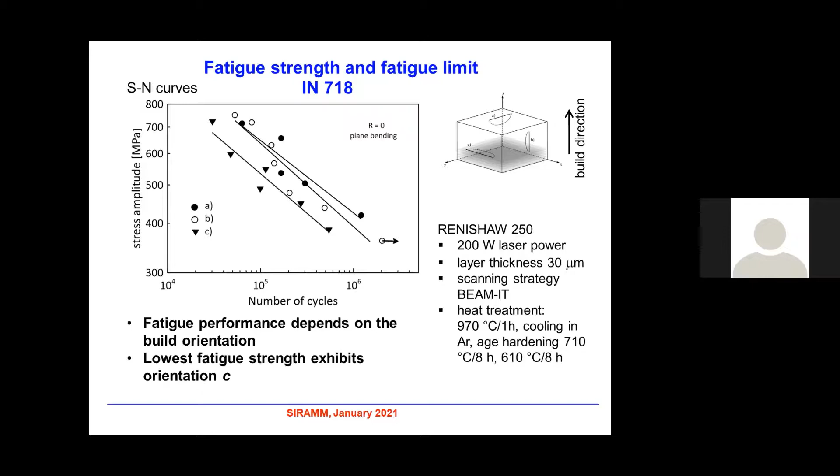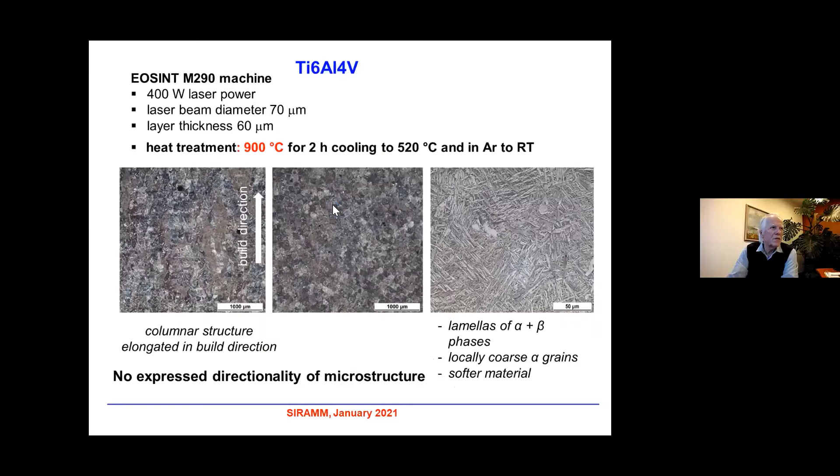I've seen that in the Paris domain, there is influence of microstructure only in case of Inconel. Yes, the influence in the Paris region was relatively small.

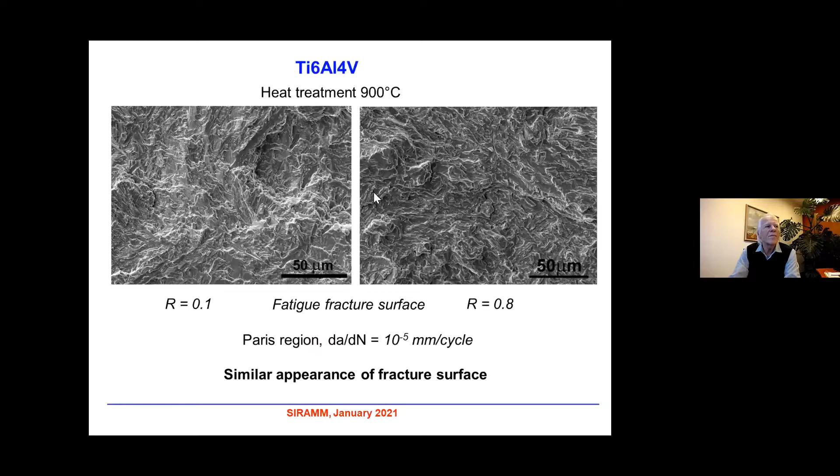I think the main point is that for titanium 6, the fatigue strength as-built material is around 600, 700 megapascals, and here it's only 150. So we need to be careful when we design and use additive manufactured components regarding fatigue.

Exactly. Many parameters set for this production can strongly influence the fatigue parameters. It is not the case for, for example, tensile properties, where the influence is much weaker. However, in the case of fatigue, it has to be taken into account, and it is important to test material from the point of view of defects and microstructure, simply to be careful.

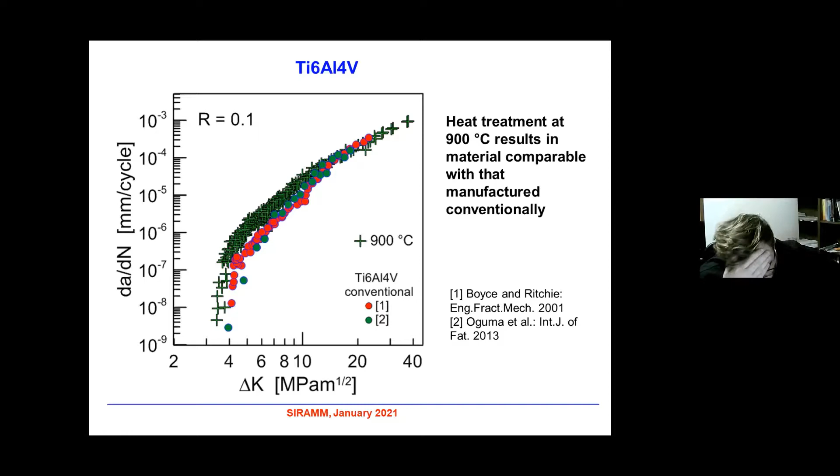Just a curiosity, you have mentioned several times a so-called scanning strategy developed by BEAM-IT. What do you mean by scanning strategy? Are you referring to some process parameters involved in the printing process? No, frankly speaking, we only have data from this company, and at the time it was a little bit secret how to scan the material. So we said, okay, this strategy was developed here, and in cooperation with them, we prepared this material.

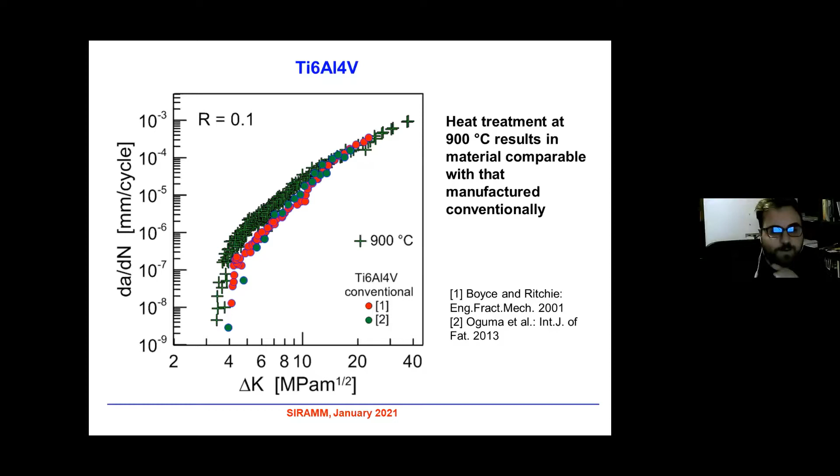I think this may generally be a problem of knowledge, and if it's a company, the company is not ready to share that knowledge. I know there are systems where you can, also in your institute, change the parameters and study this in detail, but that was not our case. Our case was simply to take material prepared for conventional cases and check the material properties. Thank you. Gianni Nicoletto is maybe more informed.

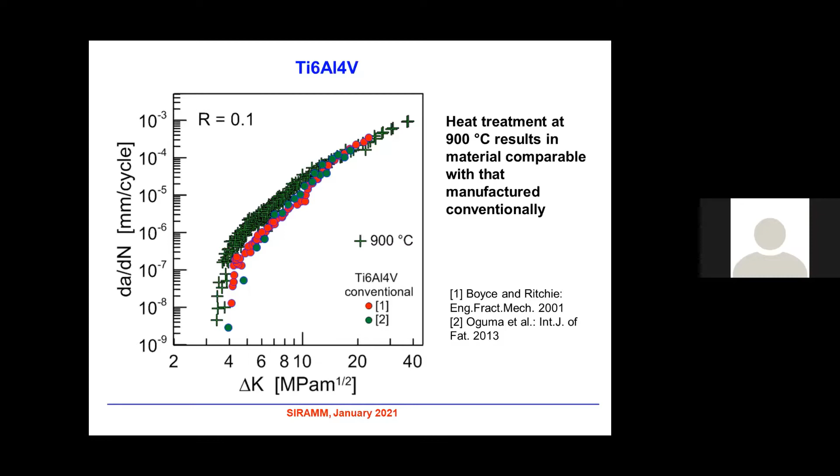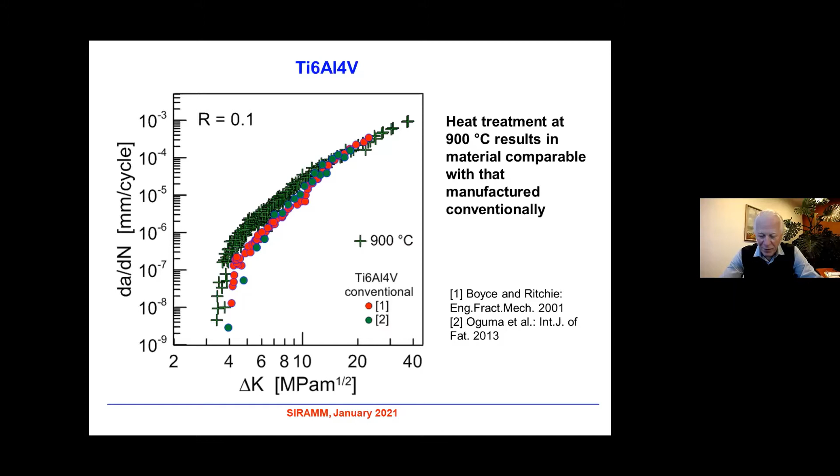I have two questions. The first one is, have you done any surface finishing with the specimens, or are these as-built, just out of the additive manufacturing machines? As-built. Now we are performing experiments where we polish our specimens. Just a moment, if you see my presentation, we are now playing with surface finishing of these parts on these same specimens.

We try to have material which is as-built, material after shot peening, and material which is polished in conventional ways. We would like to measure the fatigue behavior of the material to determine whether it is possible to use this polishing procedure. Naturally, if you polish the material very well, you can reach better results.

And the second question is, have you done any high temperature fatigue experiments? Up to now, not with this material. In the institute, we are able to perform experiments up to very high temperatures, but we haven't performed experiments on these 3D printed alloys up to now. Okay, thank you very much.